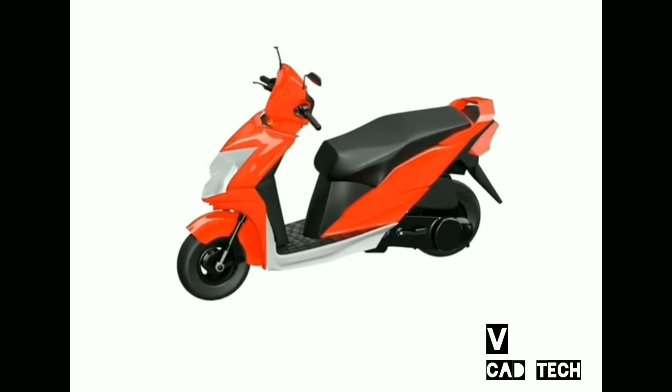The gearless scooter is one of the most common two-wheelers popular in many parts of the world. They are typically equipped with an automatic transmission system known as Continuously Variable Transmission, or CVT.

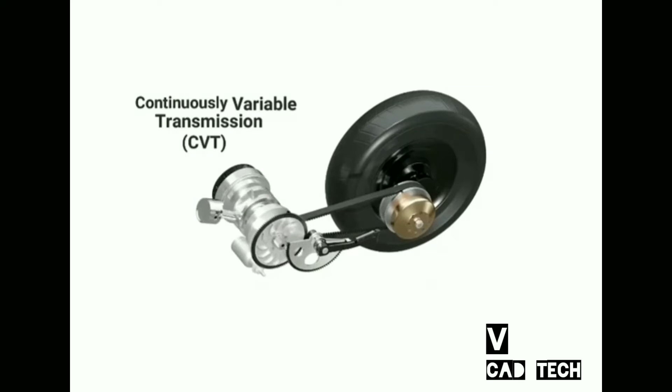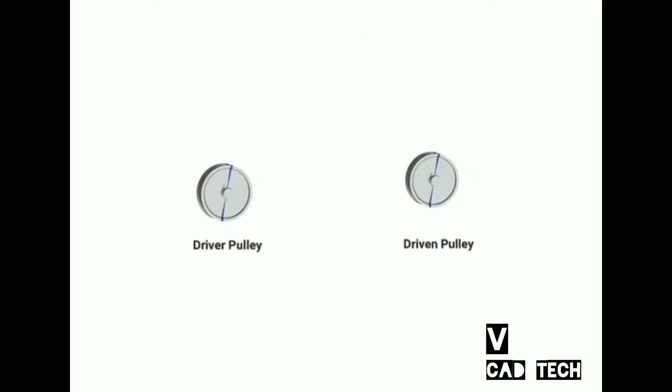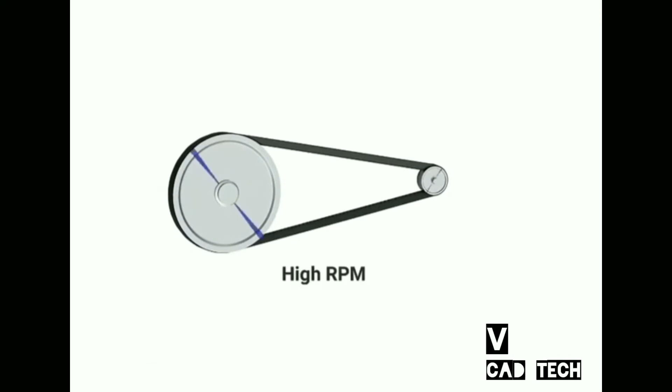The basic principle of a pulley-based CVT can be demonstrated using this simple setup. It has a driver pulley and a driven pulley with variable diameters, and a V-belt of constant length runs between them. High RPM is obtained by increasing the diameter of the driver pulley and decreasing the diameter of the driven pulley. High torque is obtained by doing the opposite. This system allows us to achieve an infinite number of drive ratios between the minimum and maximum limits.

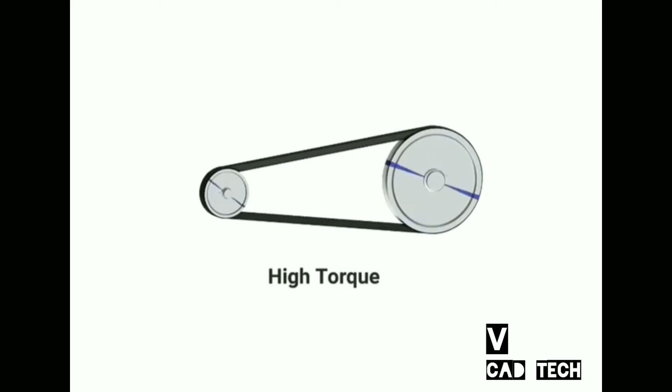It is not possible to simply change the diameters of solid pulleys as shown in this demonstration, so engineers developed certain mechanisms to obtain similar mechanical characteristics. A variator is used for this purpose.

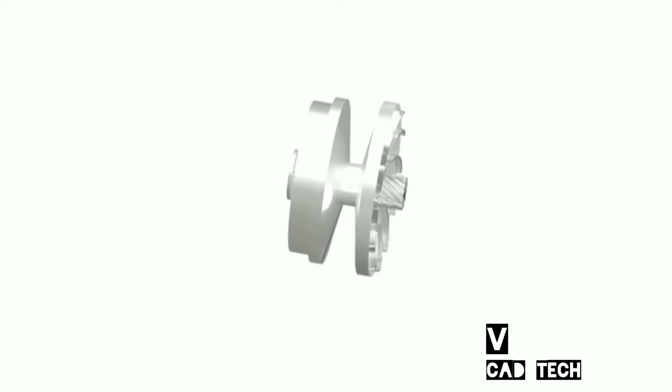Here, the pulley is made up of two conical plates. One of them is fixed to the input shaft, and the other is free to slide along its axis. A V-belt runs between these plates.

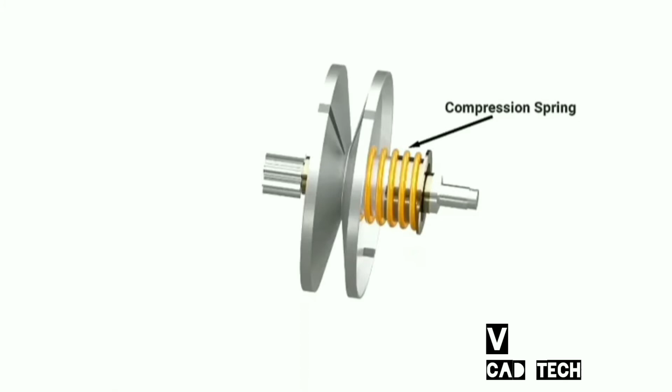The rear side also has two conical plates between which the belt runs. One of these plates is fixed to the shaft, while the other can slide sideways. A compression spring forces the sliding plate to stay close to the other plate, which forces the belt to stay at the highest diameter of this pulley.

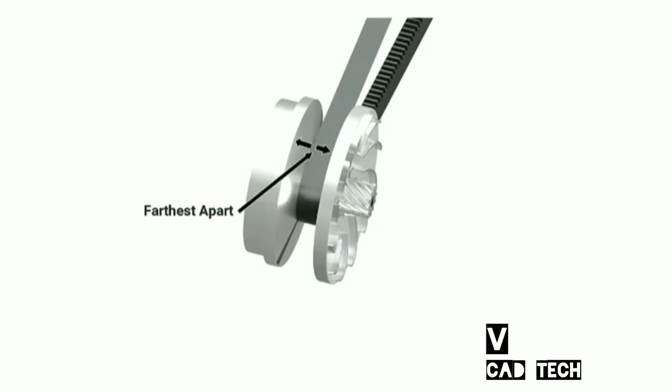In the driver pulley, the axial stiffness of the belt pushes the sliding cone farthest apart. This causes the driver pulley to have minimum diameter. This is the condition of high torque, low RPM.

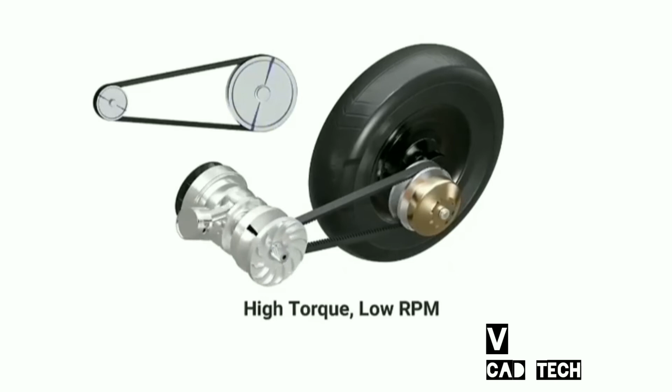To obtain high RPM, the diameter of the driver pulley increases and that of the driven pulley decreases. Let's understand how this is achieved in the actual scooter CVT.

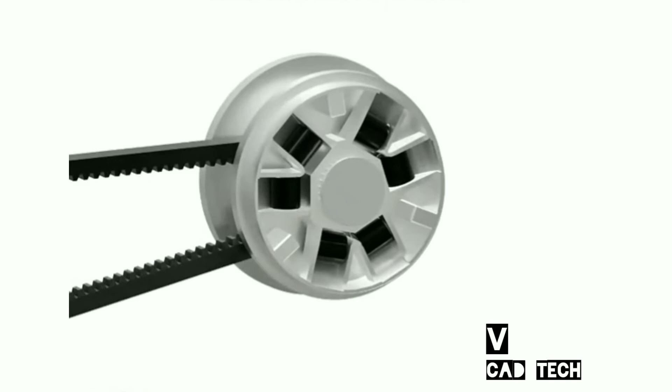The sliding conical plate of the driver pulley has a set of rollers or sliders. When the engine is at low RPM, the rollers are held near the center of the pulley. As the engine gains speed, centrifugal force causes the rollers to move outwards along a curved surface. These rollers push against the ramp plate, and since the ramp plate is fixed, the sliding conical plate is forced towards the other plate.

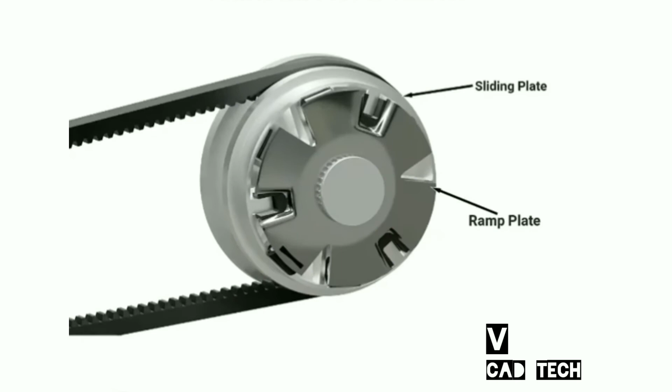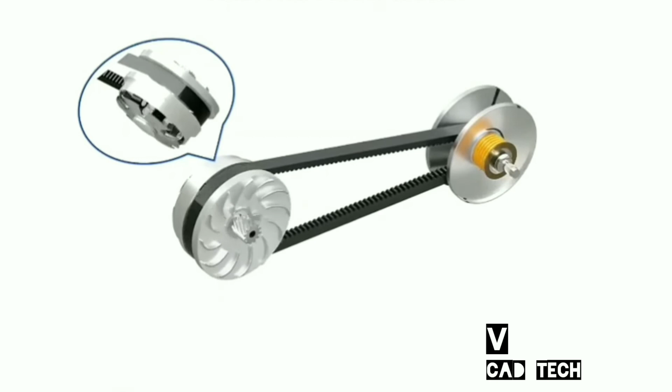Let's see the diameter change in slow motion. This is similar to the condition of high RPM, low torque, as we observed in the demonstration.

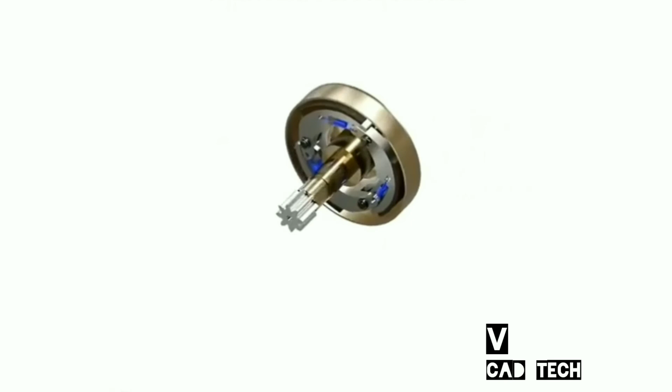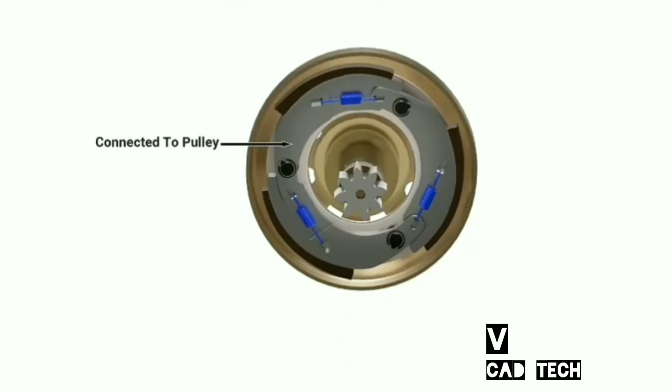This transmission system includes a centrifugal clutch assembly. The inner portion consists of weighted arms held in place by extension springs, and these arms are connected to the pulley. The clutch housing is connected to the output gear. When sufficient centrifugal force causes the arms to swing outward, the friction pads engage with the clutch housing.

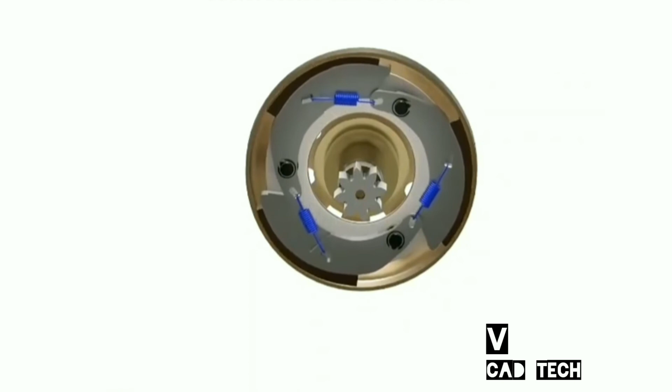The clutch housing transfers power to the rear wheel through a gear train.